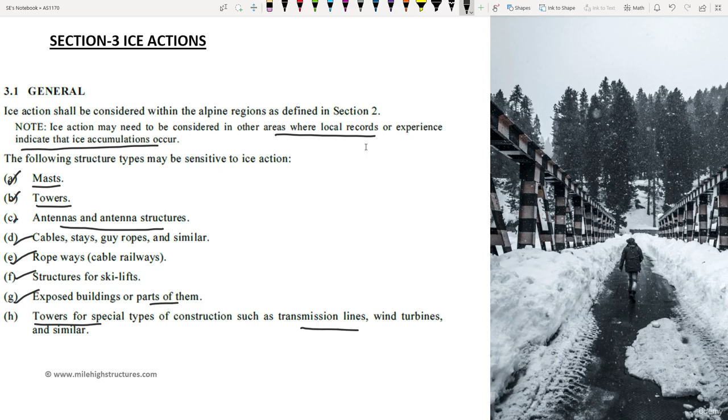What are the structures which are most prone, or sensitive, to ice actions? There are masts, telecommunication towers, antennas or antenna structures, cables, or ropeway structures for ski lifts, or exposed buildings, or towers for special types of construction such as transmission lines, wind turbines, or similar kinds of structures.

I just want to show you one photo, a classic example of ice action. Here we can see this is a telecommunication tower, and you can see how the ice action is visible. You can see how the ice is formed on the different structural elements. On the top you can see the ice, and here also on the platform you can see the ice.

As per the code, unlike wind and earthquake, we do not take these actions together. But if we're talking about snow, we do consider it; and if we're talking about wind actions, we need to consider some percentage of snow at the time of wind, and some percentage of snow at the time of earthquake also. So snow load is not a load that occurs only once in a while. That load is there for, let us say, 2 to 3 months in the snow season, when this snow may form on the particular structure. On that basis, we consider the appropriate action of snow in combination with wind and in combination with earthquake.

So the second question comes: how we can consider the thickness, or how we can consider the action of wind with the snow. That we shall discuss shortly.

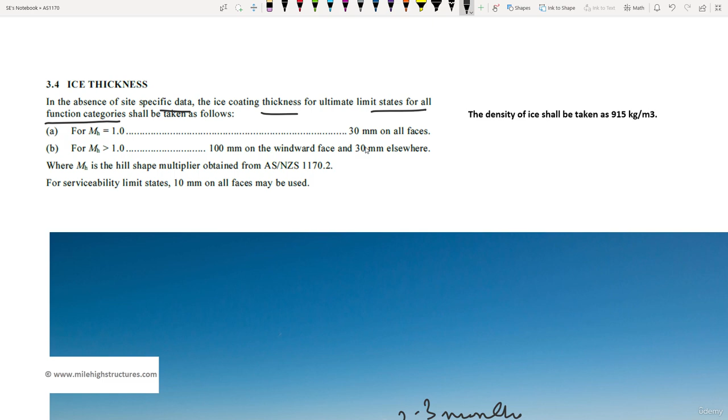If we're talking about ice thickness, in the absence of site specific data, the ice coating thickness for ultimate limit state for all function categories shall be: for mh equal to 1, it shall be 30 mm on all faces; and for mh greater than 1, it shall be 100 mm on the windward face and 30 mm on the rest of the faces, that is the leeward face. What exactly is mh? We already discussed this when talking about wind loads - it is the hill shape multiplier obtained from AS NZS 1170.2.

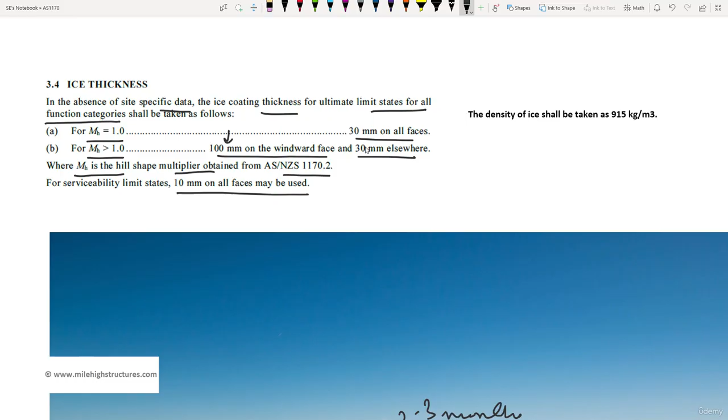But if we're talking about the serviceability limit state, we need to consider only 10 mm on all the faces, unlike 100 mm when mh is greater than 1 in the ultimate limit state design. So that is the basic criteria. The density of ice can be taken as 915 kg per meter cube.

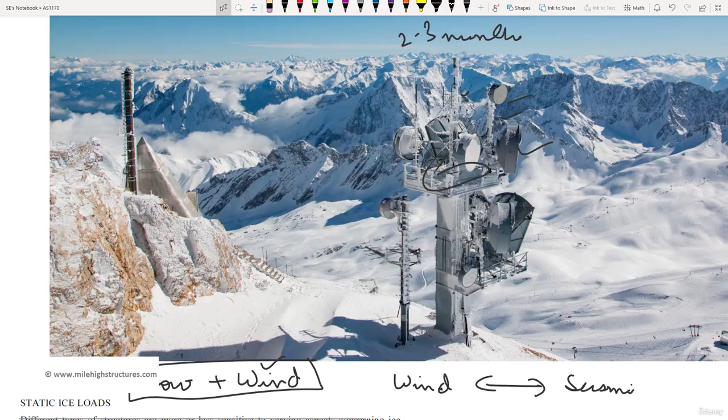After that, if we're talking about static ice loads, what we mean is that different types of structures are more or less sensitive to various aspects of ice actions. The structures may be stretched out steel ropes, cables, mast guys, slender lattice structures, antennas and antenna structures, or covering materials such as cladding. The most vulnerable types of structures are cables, ropes, and light lattice structures, that is guyed masts.

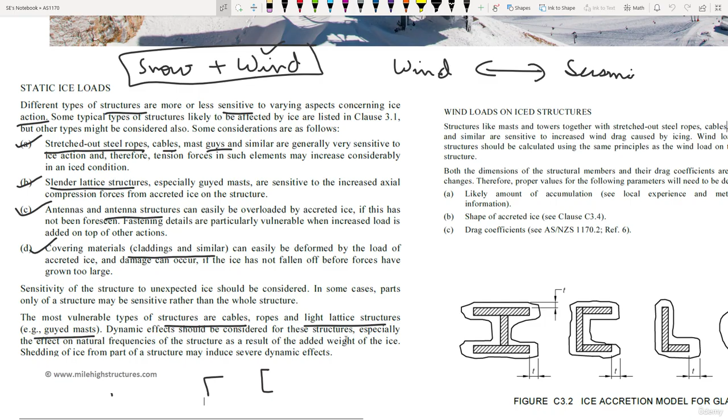Dynamic effects need to be considered for these kinds of structures. Why? Because these structures are not made with very heavy sections - they are either made with L angles or C channels, and they are very much sensitive to wind action, earthquake action, and in combination with ice action also. So we need to think carefully when designing these kinds of structures in alpine or subalpine regions.

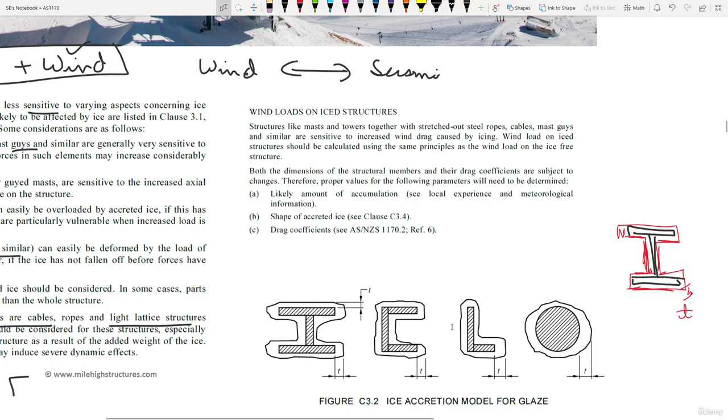Now, how can we assume the ice shall be accumulated, or how can we say the effective area for the wind shall be increased? Here you can see, if this is an I section, we need to understand that when talking about accumulation of ice, the ice shall be accumulated on all these faces, something like this. This is the thickness T that we already discussed - for mh equal to 1, the thickness needs to be approximately 30 mm, and that needs to be 10 mm for the serviceability limit state.

Similarly, for C channels also, the ice shall be accumulated something like this, for L angles also, and for circular hollow sections also, or wires also. So it's not just hollow sections, but solid sections also. Let us say we are designing a transmission tower from one point to another, and this is the wire. On this wire itself, we need to consider this thickness T, and whatever load is coming at the supporting point, that load has to be the self weight of the wire plus the weight of the ice accumulated on all the periphery.

So both the dimensions of the structural members are subjected to changes, and the reasons are likely amount of accumulation, shape of accreted ice, and drag coefficient.

Drag coefficient is the concept we already discussed when talking about wind dynamics - the wind flows, and on particular areas or edges the main action of the wind happens, and we have to consider the drag coefficient appropriately as per the shape. So drag coefficient shall be different for I section, different for circular, different for square and rectangular also.

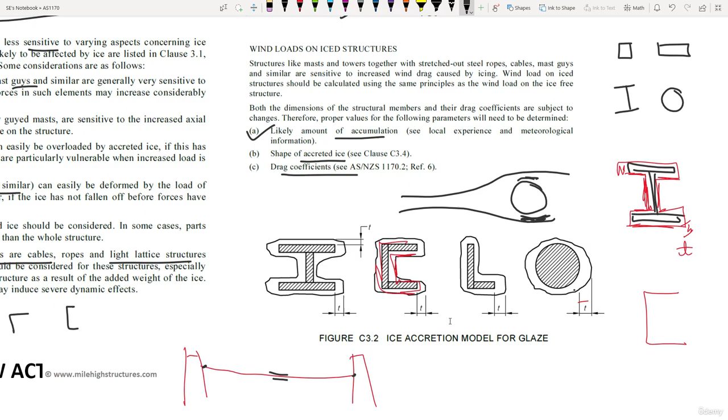So after that, if we're talking about snow action, the procedure for determining the values of the snow action shall be as per AS NZS 1170.0. That is a general statement.

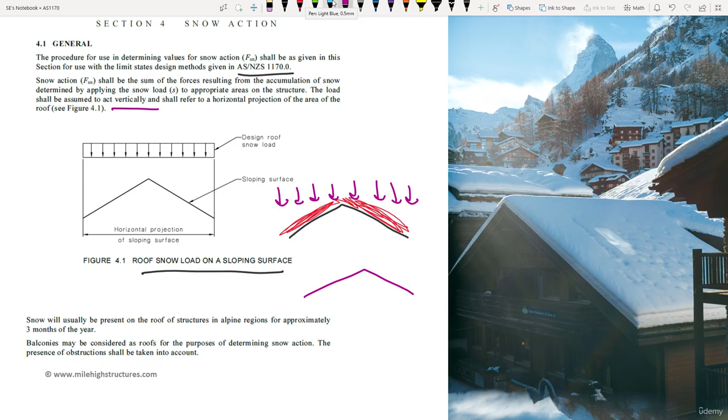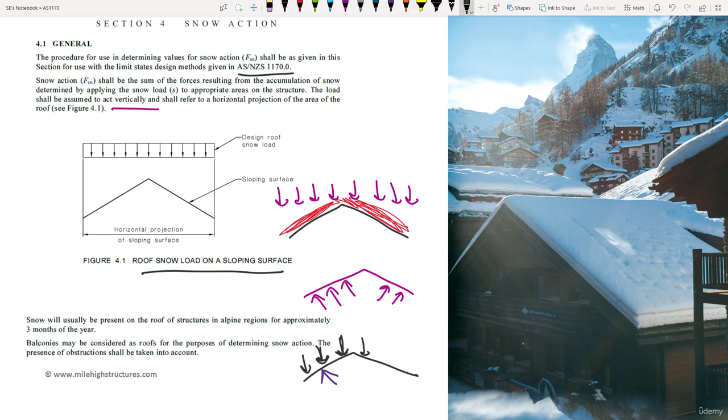Unlike wind action, where we consider the local axis, at the time of snow we do not consider the local axis, we consider the global axis. So unlike wind, which acts something like this, at the time of snow action the load is something like this. After that, snow will usually be present on the roof of a structure for approximately 3 months of the year when we're talking about the alpine region.

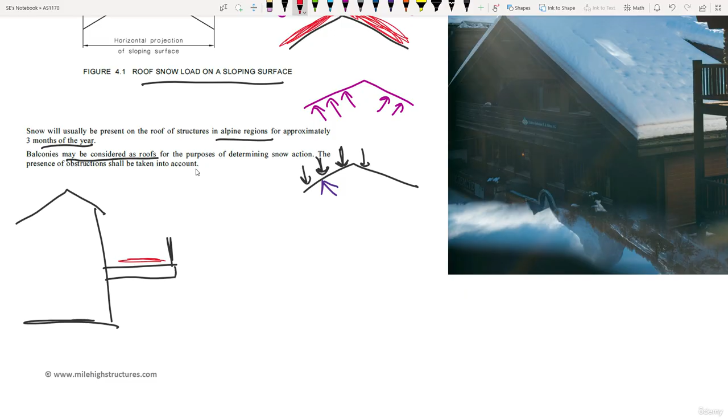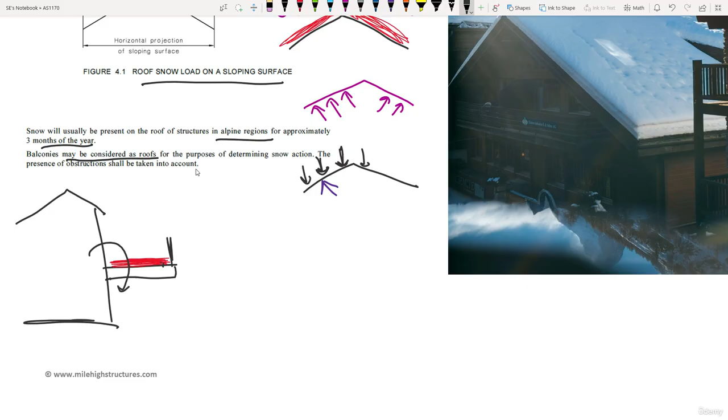That is not valid for the subalpine regions. Balconies are also most susceptible to damage from snow actions, because many times we have seen that the balcony is usually open. So let us say this is the building and this is the balcony - at the time of snowfall, the snow may accumulate here also. So we need to ensure that whatever bending moment we are considering at this particular point, we have to take the weight of the snow also.

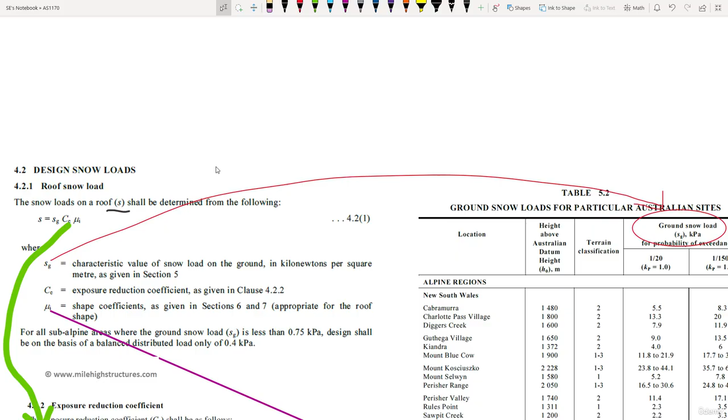What shall be the weight of the snow, we shall discuss shortly. The code is helping us to calculate the snow load. This is the typical example of calculating the snow load on the roof. Now here we have 3 different terms, SG, CE and mu I. So snow load on the roof is named as S, and that is equal to SG.

What exactly is meant by SG? SG is the characteristic value of the snow load on the ground. Now what exactly is the characteristic value? Characteristic value is the value that still has a probability of exceedance by 5%, that is 95% of the time the value shall be lesser or equal to that, but there is a 5% probability of exceedance of this particular loading value, and this value is given in kN per square meter. So let us say if you're talking about New South Wales, and the Mount Blue Cow region.

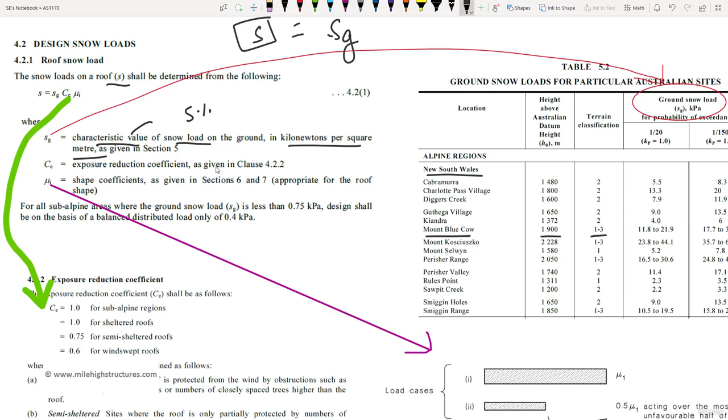So height above elevation, above Australian datum height, that is basically 1900 meters. Terrain classification is in between 1 to 3. So for ground snow load SG, for probability of exceedance.

Now in majority of cases, this is the probability of exceedance for the strength limit state, and this is the probability of exceedance if you're talking about serviceability limit state, or structures which have lesser importance. So in majority of cases it is 1 by 150. And if you're talking about Mount Blue Cow, the value of SG is between 17.7 to 32.9 kilonewton per meter square, or kPa.

Now I must say this value is high, not low, because putting the value of 17.7 kN per meter square for SG is very high. So we do have still higher values - let us say if you're talking about this particular zone, which has a height of 2228 meters, here the value is as high as 66.2 kPa.

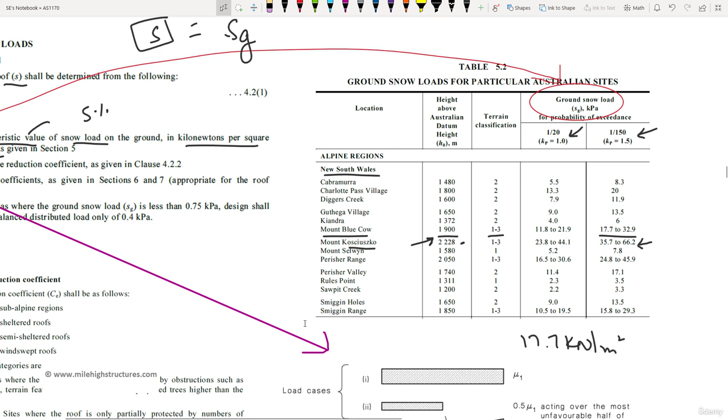So if we are having a structure near to this particular level, we do need to take the appropriate value of the snow actions. So after that, we have understood that SG is the value that is as per the location.

After that, CE value. CE is the exposure reduction coefficient. For subalpine region it is 1. For sheltered roof it is 1. For semi-sheltered roof it is 0.75, and 0.6 for the wind swept roof.

If you're talking about the sheltered site, the roof is protected from wind by obstructions such as other structures, terrain features, or closely spaced trees higher than the roof. Semi-sheltered means a site where the roof is only partially protected by scattered obstructions higher than the roof, such as scattered trees.

Wind swept is the area where the roof is exposed on all sides with no protection provided by obstructions, trees, or terrain features higher than the roof. In that case, exposure reduction coefficient CE shall be considered as 0.6.

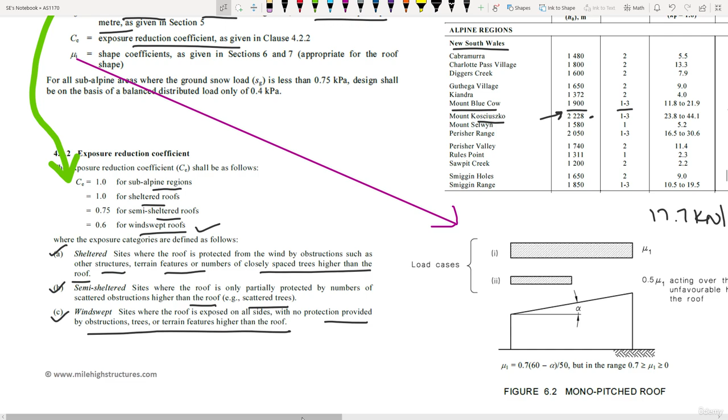After that, the third is the shape coefficient mu I. So mu I is basically as per the shape of the roof itself. If we are having this particular monopitch roof, the value of mu I is basically 0.7 times 60 minus alpha. Alpha is basically the angle here.

Let us say this angle is 10 degrees. So 60 minus 10, and that needs to be divided by 50. So whatever value we are getting here, that has to be between 0.7 and 0.

So that is the basic, first load case, whatever value we are getting. Second load case shall be that only half of the roof is loaded, the other half unloaded, and this usually happens because of the shape of the roofing. Sometimes the snow gets heavily loaded here and very lightly loaded here, forming a pattern like this.

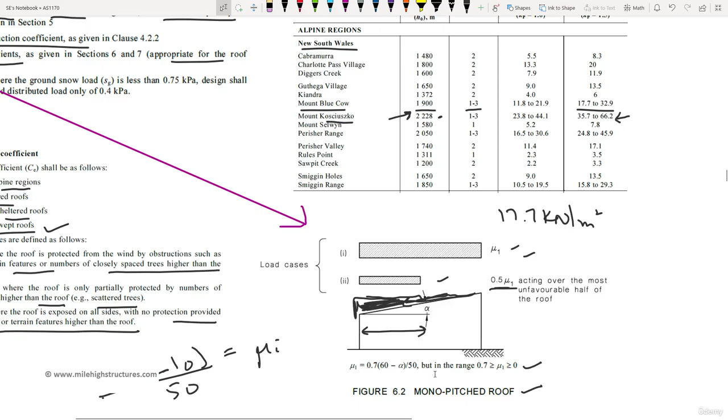After that, in majority of cases there is snow overhanging from the edge of the roof, and this is very risky because it can fall on our head and lead to accidents. That is why in majority of areas ice breakers are installed, so that this kind of formation does not happen.

But if we do not have any other option except to consider this kind of action, the code helps us in calculating the snow overhanging the edge of the roof. So design of those parts of a roof cantilevered beyond the edge of the wall shall take into account the snow overhanging the edge of the roof.

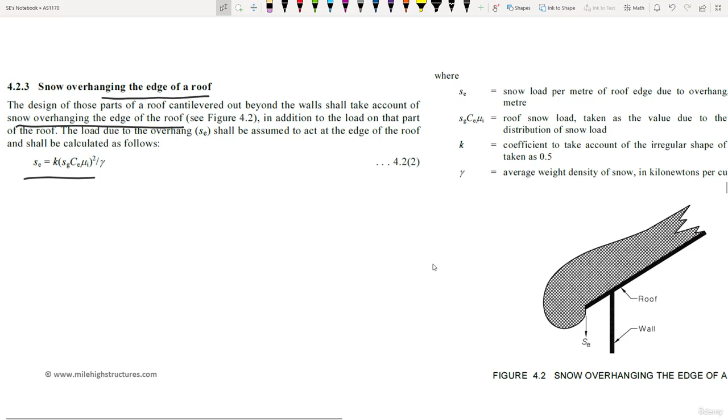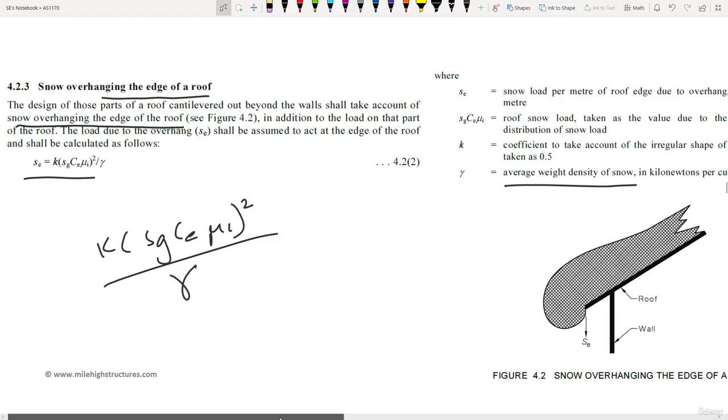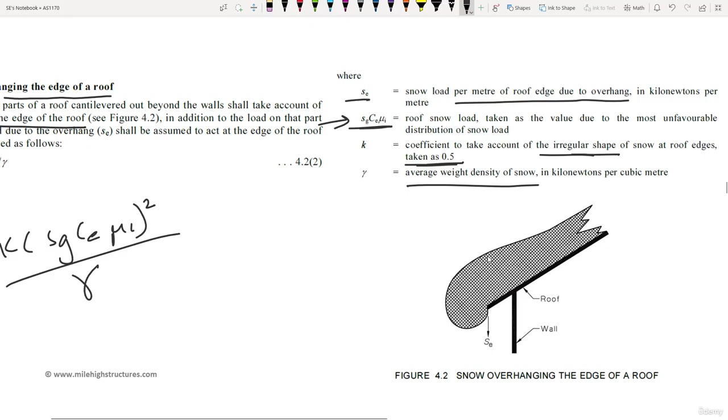The formula is K multiplied with SG, CE, mu I, that we have already understood, to the power 2, divided by gamma. Gamma is the average weight density of the snow in kN per meter cube, and K is the coefficient to account for irregular shape, usually taken as 0.5. SG, CE, mu we have already discussed, and SE is basically the snow load per meter of roof due to overhanging. This is the value of SE we need to calculate.

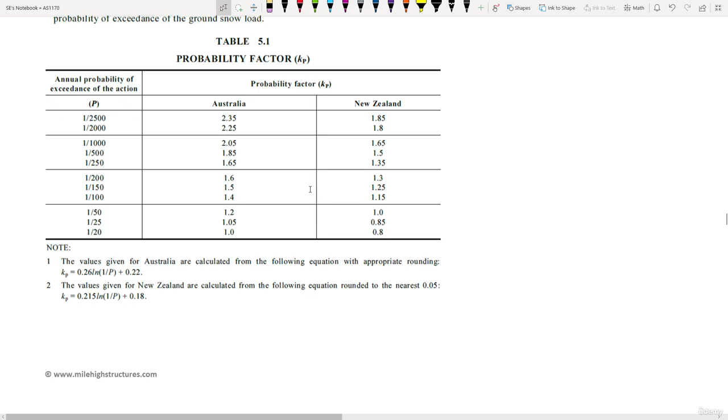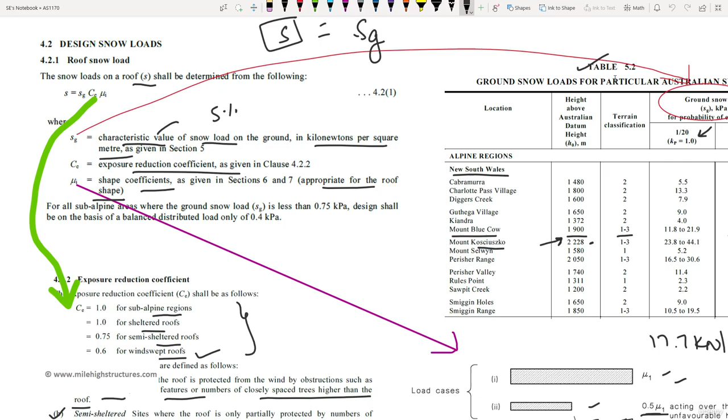So these are the various values or concepts that you need to understand. Now let me revise all the concepts we have understood. The important concept is that the snow load can be calculated as SG, CE, mu I. SG is the characteristic value taken from table 5.2. CE is the exposure reduction coefficient, different for different conditions, and mu I is the shape coefficient dependent on the shape of the roofing arrangement.

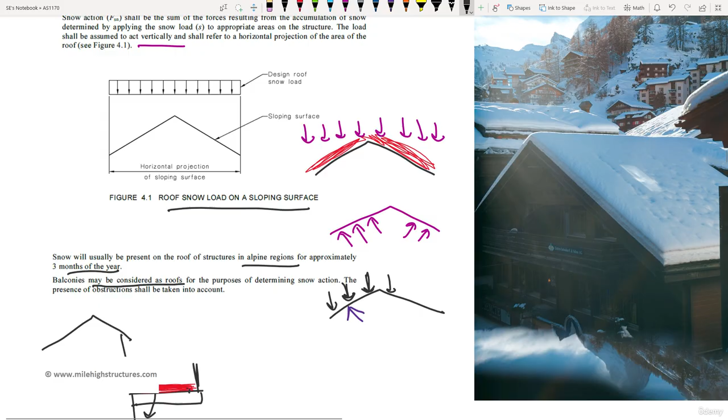Before that, we understood what exactly is the snow action. The snow action shall always be taken in the direction of gravity itself, unlike wind, which is usually taken on the local axis. Before that, we have understood about the effect of ice on structures.

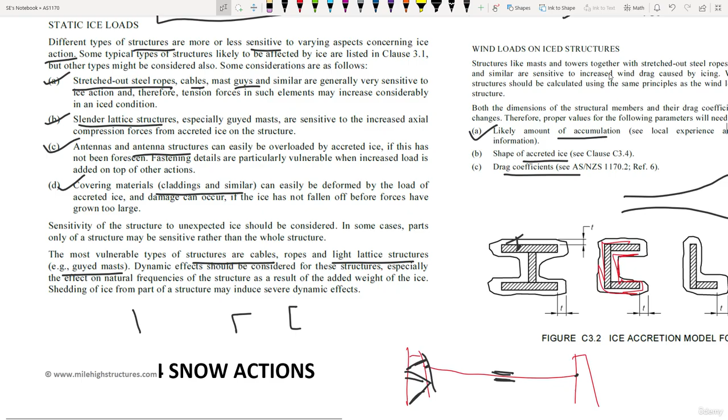We need to consider the thickness of the ice in calculating the total effective area and the self-weight of the structure also. The most susceptible are the wires and ropes. So if we are designing transmission towers, we need to consider the accumulation of ice, and according to that we need to calculate the dead load or self-weight of the structures.

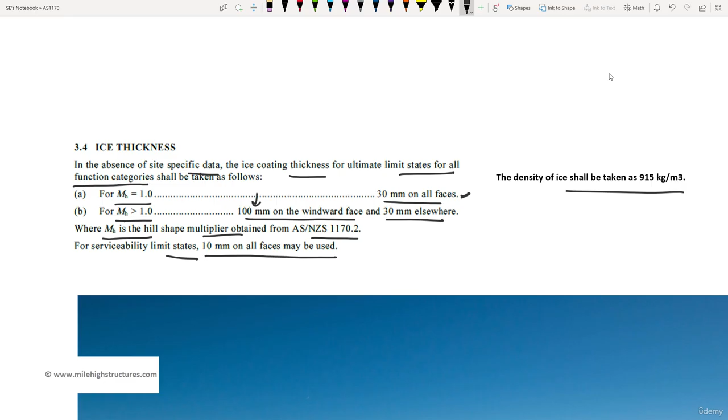Ice thickness is taken as 30 mm for Mh equal to 1. For Mh greater than 1, it is 100 mm on the windward face, 30 mm on the leeward face. And for the serviceability limit state, irrespective of the value of Mh, 10 mm needs to be considered.